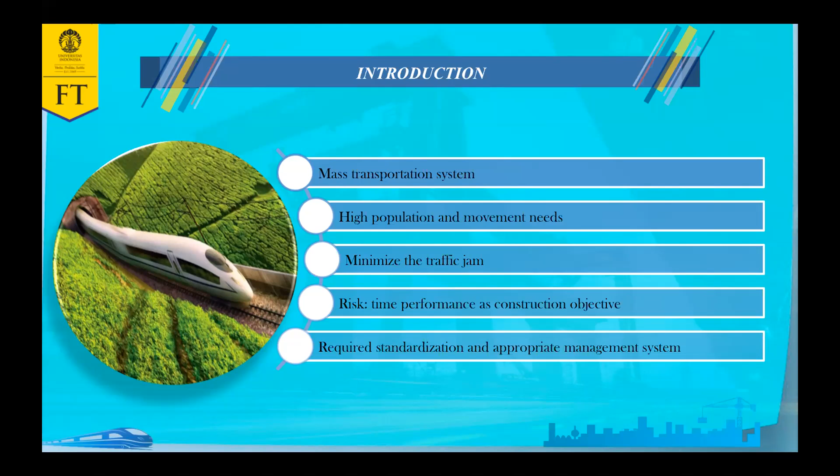Our concern in the development of standardized WBS is that for most of our projects, there is no formal approved WBS, I mean approved between the owner, the project contractor, and consultant. The cost estimation is based only on the BOQ, bill of quantity. And concern number 3 is different work packages and project activities on the BOQ among projects, and different work items. And the high-speed railway project is a new one in Indonesia.

The research questions and objectives. We have 3 questions in our paper. Number 1 is how to create a standardized WBS for high-speed railway. Number 2 is what are the risk factors based on resources, activities, and work packages that influence the time performance on a high-speed railway project. And question number 3 is how to develop a risk-based standardized WBS with the objective to improve time performance on the project.

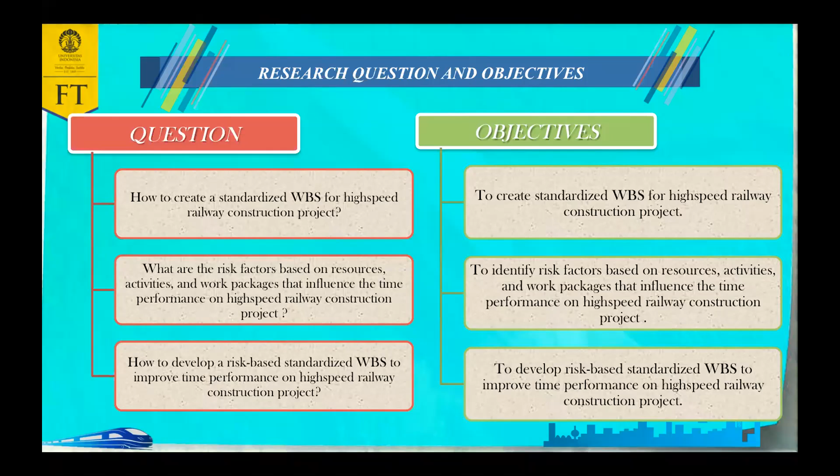Therefore, the objectives in this research are number one, to create a standardized WBS. Number two, to identify the risk factors based on resources, activities, and work packages. And number three is to develop the risk-based standardized WBS to improve time performance on high-speed railway construction projects.

For our refreshment, the work breakdown structure is the process of subdividing project deliverables and project work into smaller, more manageable components. The key benefit of this process is that it provides a framework of what is to be delivered. The WBS also provides the framework for the schedule management plan, allowing for consistency with the estimates and resulting schedules. The WBS provides the relationship among all the project deliverables and their various components.

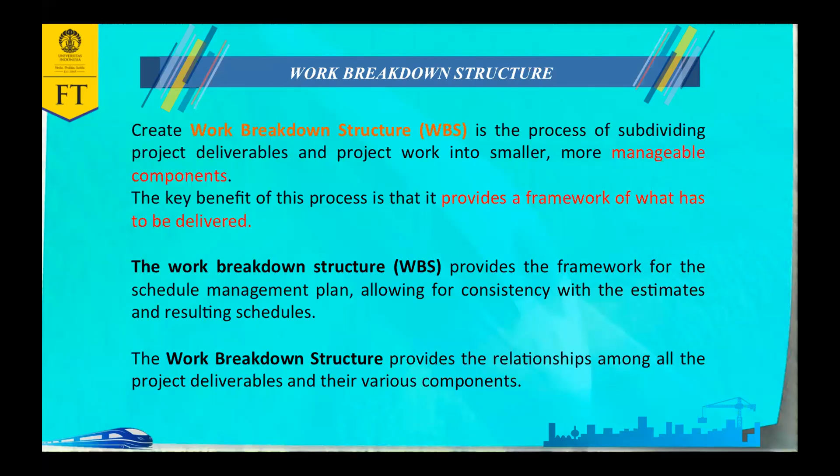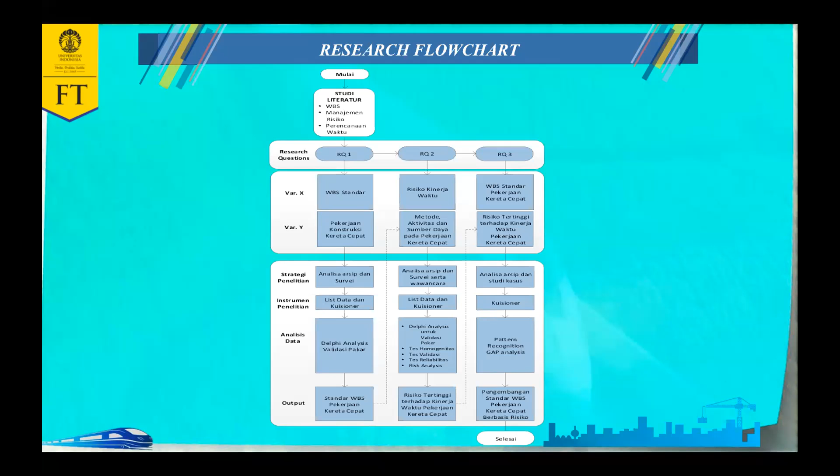This is our research flowchart. We are sorry, but it is still in Indonesian. It starts with a literature study, and then we have 3 research questions. This is the research variable, and the output for each question is the standardized WBS, the dominant risk, and the developed standardized WBS.

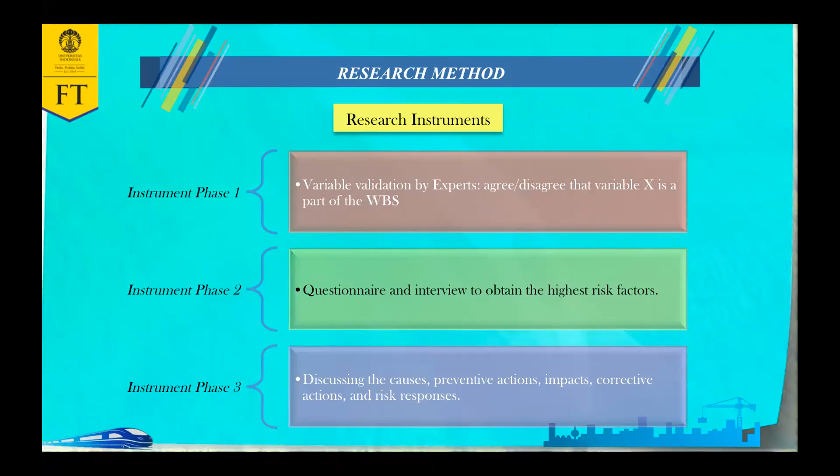These are the research instruments we have in this research. The first one is variable validation by experts, agreeing or disagreeing that the variable is part of the WBS. Phase 2 is where we provide a questionnaire and interview to the experts to obtain the most dominant risk. And phase 3 is discussing the causes, preventive actions, impacts, corrective actions, and also risk responses as well.

Didi, 3 minutes left. Yes, I'm sorry.

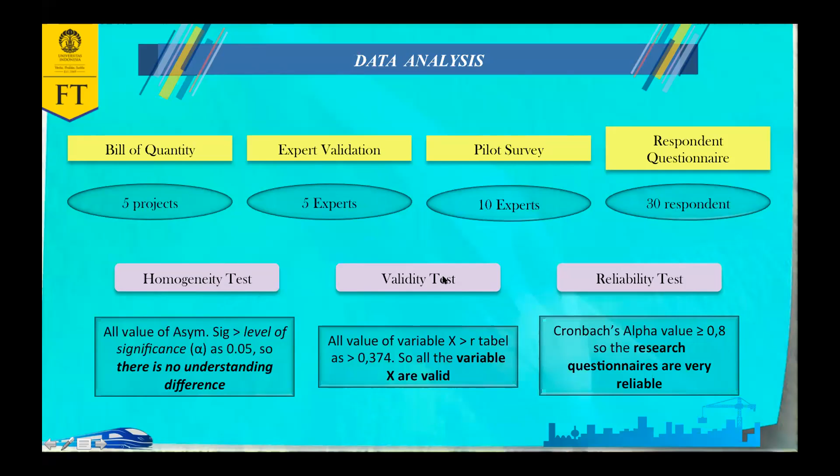This is the data analysis from 5 projects we studied, continued by 5 experts for validation, pilot survey, and respondents. We have 30 respondents. On the data we performed the homogeneity test, validity test, and reliability test, and all 3 tests passed as we expected.

This is a pattern recognition sample. For example, for risk variable number X10, we have 8 cause elements and 21 preventive actions.

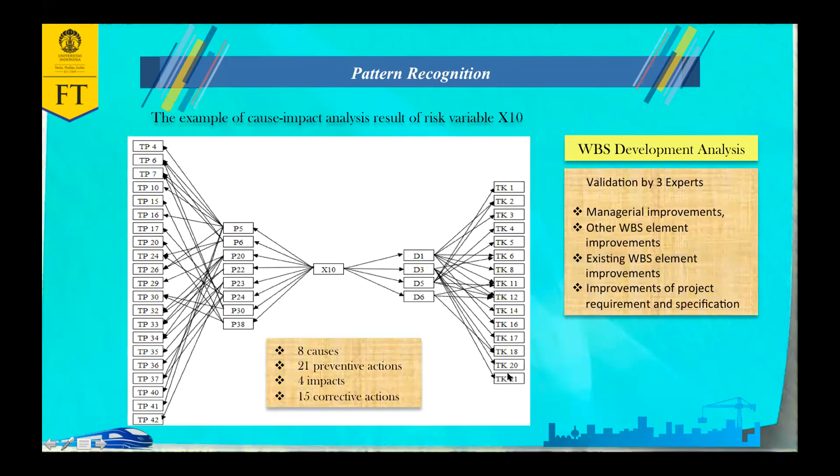And then the X number 10 is also results for impacts. These 4 impacts will be followed up by 15 corrective actions.

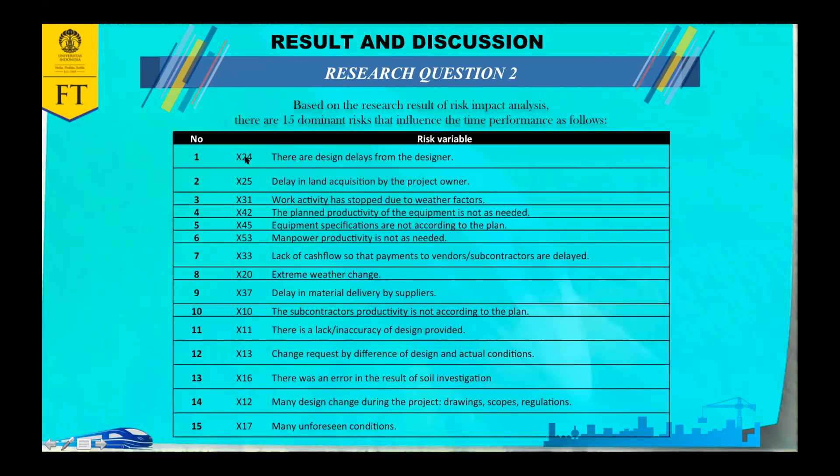This is the 15 most dominant risks that influence the time performance of high-speed railway projects, and we have ranked the 15, starting from X24 to X17.

And the conclusion is a standardized WBS for high-speed railway construction. We have 6 elements, as we also previously stated. And number 2 is there are 15 dominant risks.

Based on conclusion number 1 and number 2, we have conclusion number 3: development of risk-based WBS to improve time performance on high-speed railway construction. We hope that by performing and constructing the project with this WBS, we will minimize the risk of time performance, such as late or delayed projects.

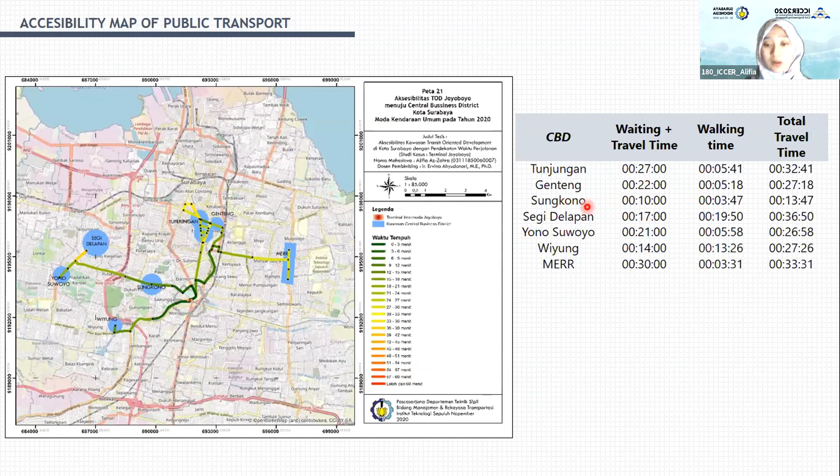Conclusion. This research is designed to calculate the travel time from a TOD transit point, Jayabaya terminal, to Surabaya CBD.

Based on the travel time survey result, you can see in the table and the graphic, it shows better accessibility to Surabaya CBD by private vehicle at this time.

So for further research, it is recommended to find several scenarios to develop the accessibility of Jayabaya terminal, accessibility for public transport, so it can bring success to the ride in the park and ride concept, and also transit in the transit-oriented development concept itself.

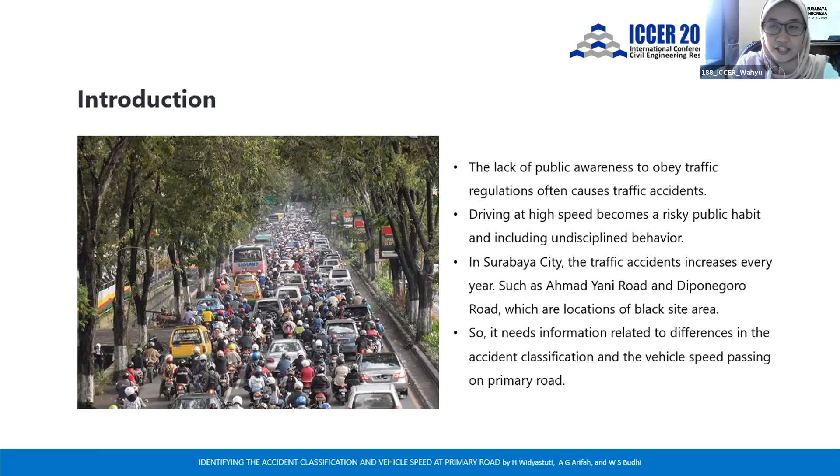And in Surabaya City, traffic accidents increase every year, such as on Ahmad Yani Road and Diponegoro Road, which are locations of the black spot area. Considering this condition, identification is needed related to differences in the classification of accidents and vehicle speed that can cause accidents in both locations.

The data used in this study are secondary data and primary data. Secondary data can be obtained from relevant institutions, while primary data is obtained from direct observation in the study area. And this is the data and its function.

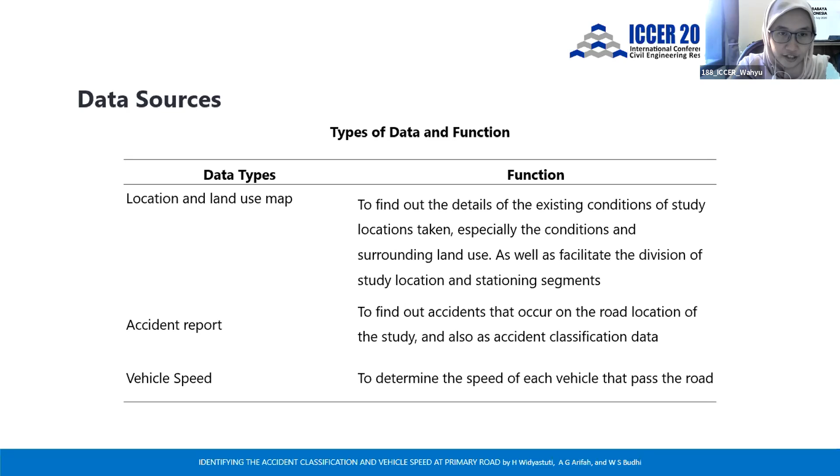For the method of this study, data analysis was carried out using the 5W plus 1H approach, namely why, what, who, where, when, and how. In detail, the classification of accident occurrence by grouping is as follows.

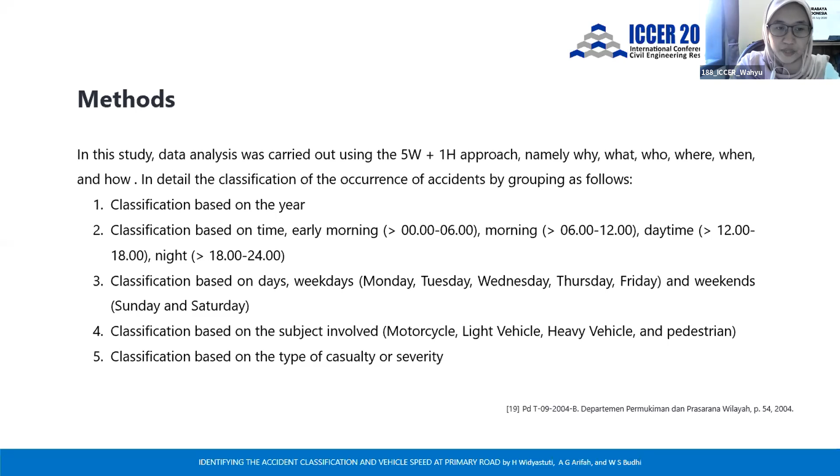First, classification based on the year. Second, classification based on early morning, daytime, and night. Third, classification based on weekdays and weekends. Fourth, classification based on the subjects involved, which are motorcycle, light vehicle, heavy vehicle, and pedestrian. And last is classification based on the type of casualty or severity.

The determination of black spot area has been analyzed using several methods, including accident rates, fatality rates, accident equivalent number, and cumulative summary. For the speed data, it was collected using measurement with an electronic speed gun, and the data was then tested for normality distribution as well as other standard statistical analysis methods. In addition, the speed limit on a primary artery road for the hub or urban area is 40 km per hour.

So this is the result and discussion. Accident classification on Ahmad Yani Road is shown in this table, and data analysis for around 5 years is divided into several categories, and the most traffic accidents based on the year is in 2017.

Moreover, the most traffic accidents based on the time occur on weekdays, Monday and Thursday, and also happen in the morning between 8 a.m. and 10 a.m.

The most traffic accidents based on the subject involved is motorcycle, and the most accidents based on severity are slight injuries. Whereas accident classification on Diponegoro Road, the most traffic accident based on the year is also 2017.

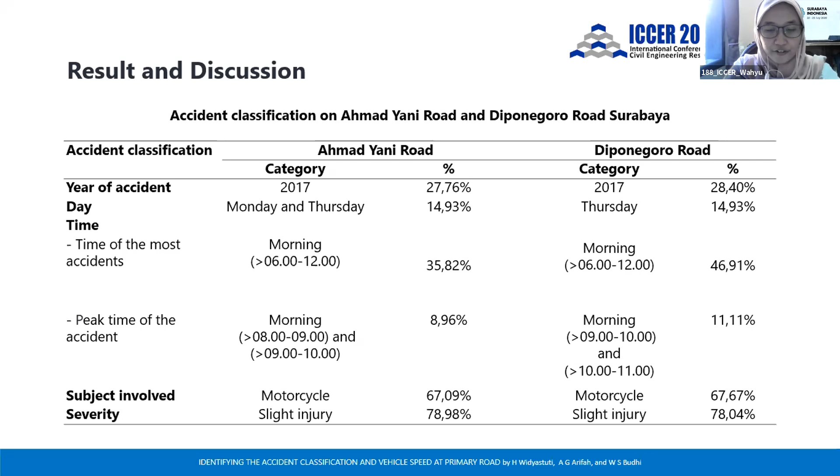And for the intersection of Diponegoro Road, it is at the Diponegoro-Sutomo intersection. For the vehicle speed on Ahmad Yani Road, Surabaya, the average speed on the west side is 49.6 km per hour, and the average speed on the east side is...

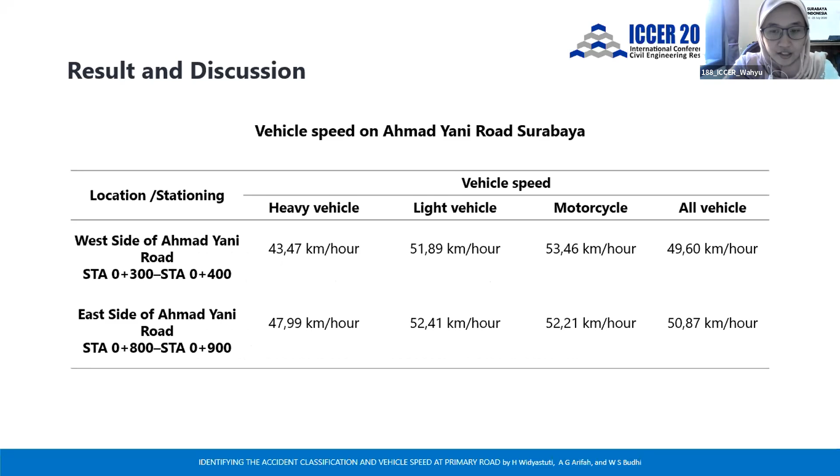50.87 kilometers per hour, whereas the average speed on the west side of Diponegoro Road is 43.44 km per hour, and the average speed on the east side of Diponegoro Road is 42.2 km per hour.

This could be possible because road users are in a rush to go to work or other important activities, and it could be that they are less aware of their driving speed, which has exceeded the limit.

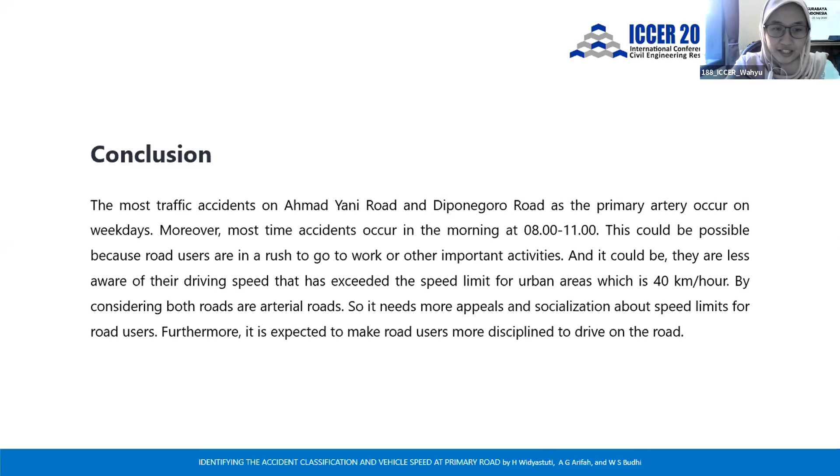The speed limit for urban areas, which is 40 km per hour, considering both roads are arterial routes, it needs more appeals and socialization about speed limits for road users. Furthermore, it is expected to make road users more disciplined when driving on the road.

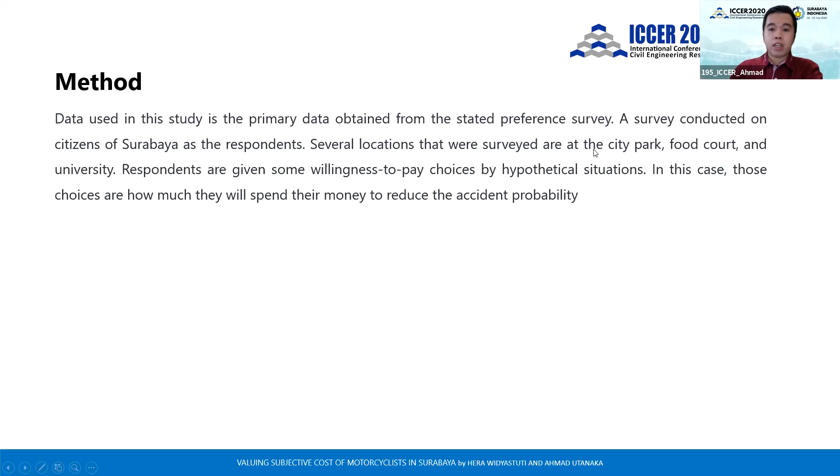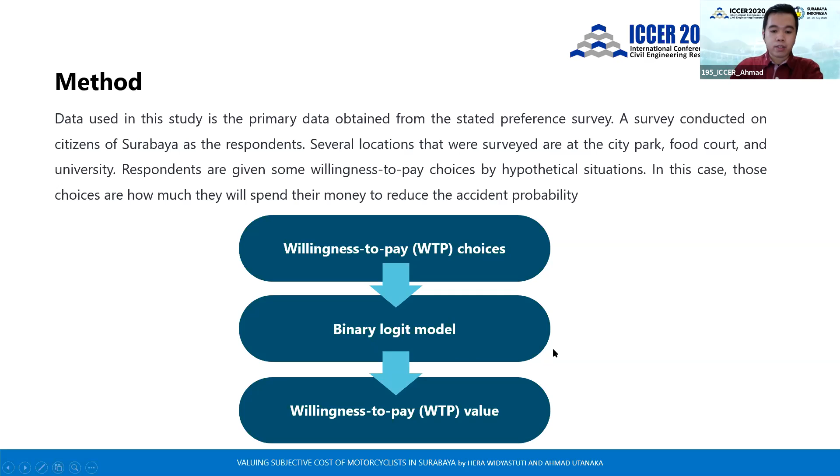Scenario 2 proves that with income increment, but age and number of children constant, the probability of reducing a traffic accident risk will increase. Scenario 3 proves that with an increment in the number of children, but age and income constant, the probability of reducing a traffic accident risk will decrease.

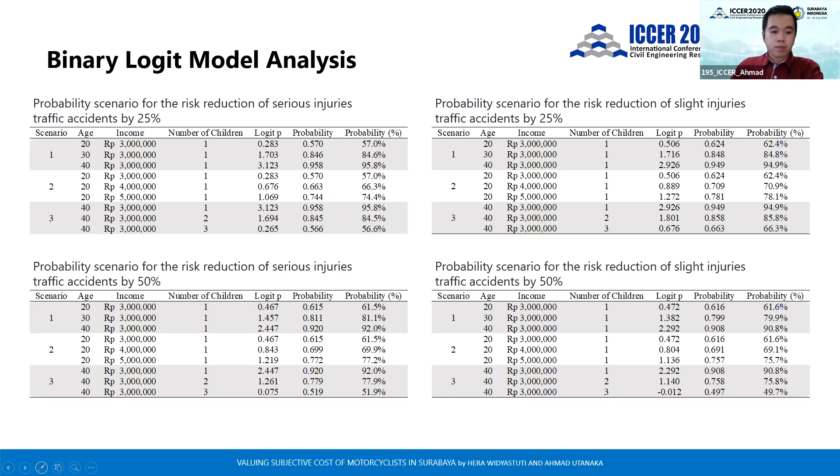The willingness to pay value for the risk reduction of serious injuries can be rounded to 126,500,000 rupiah, and the average willingness to pay value for the slight injuries risk reduction can be rounded to 13 million rupiah.

From this study, we can draw some conclusions. Variables that affect the willingness to pay choices are age, income, and number of children. Variables in each equation have a significance level better than 0.1, or 10%, so they are still acceptable and have an effect on the equation model.

The four equation models obtained show similarity; it can be interpreted that an increase in age and income will improve the probability of motorcyclists protecting themselves from an accident. However, when the number of children increases, it will reduce that probability.

The willingness to pay value of motorcyclists for the risk reduction of serious injuries is 126,500,000 rupiah, while the willingness to pay value for the risk reduction of slight injuries is 13 million rupiah.

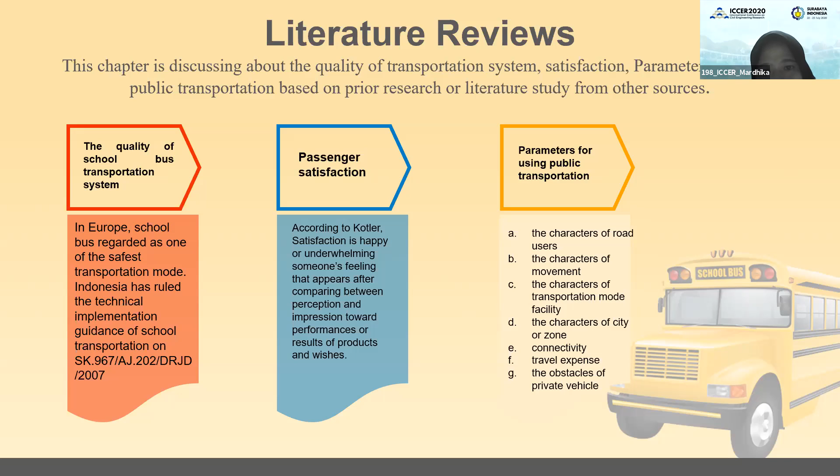Literature review. The literature review discusses some of the references: the quality of school bus transportation system, passenger satisfaction, parameters for using public transportation. Data collection. This research uses two kinds of data. They are primary data and secondary data.

Primary data: this data is obtained from survey and observation toward public school bus regarding the characteristics of condition, service and school bus trip. The researchers use closed questions and collect data by questionnaire that is spread to all students to get their satisfaction over the school bus performances.

Secondary data: school bus service route obtained from the Department of Transportation in Surabaya, the number of school bus passengers obtained from the Department of Transportation in Surabaya, time of school bus service obtained from the Department of Transportation in Surabaya, school bus services that are running obtained from the Department of Transportation, and the previous studies related to this topic.

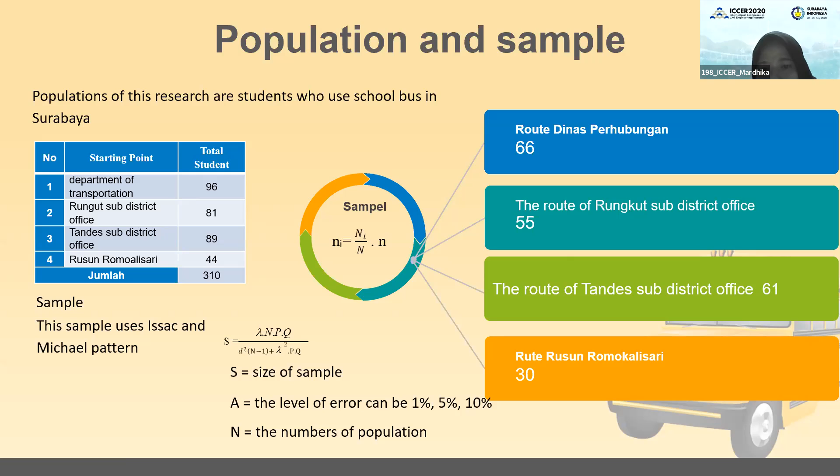Okay, population and sample. Population of research are students who use school bus in Surabaya. Sample: the sample uses the Isaac and Michael pattern. Route Dinas Perhubungan: 66. The route of Rungkut Sub-District Office: 55. The route of Tandes Sub-District Office: 61. Rusun Romokalisari route: 30.

Survey method: school bus operational performance. The researchers interview drivers and management about performances and services based on service indicators. Passenger satisfaction: the researchers survey passenger satisfaction by giving questionnaires regarding their condition and visit.

Data analysis technique. The analysis of school bus service performance: there is load factor, traveling speed, travel time, service frequency, the number of school buses, passenger waiting time, service time, start and end trip. Analysis of passenger satisfaction towards school bus service: seeking the level of suitability by using IPA, Cartesian diagram, by using SPSS 23 program.

The discussion: school bus performance in Surabaya, passenger satisfaction toward free school bus service in Surabaya. Surabaya school bus performance: route work assessment based on comparison data of assessment parameters of school bus in Surabaya. From the observation and interview results, by public vehicle service standard, the load factor average, trip speed, the number of vehicles in operation, and waiting time are in good category. The load factor average is 80% and less than 70%. The school bus speed is more than 10 km per hour.

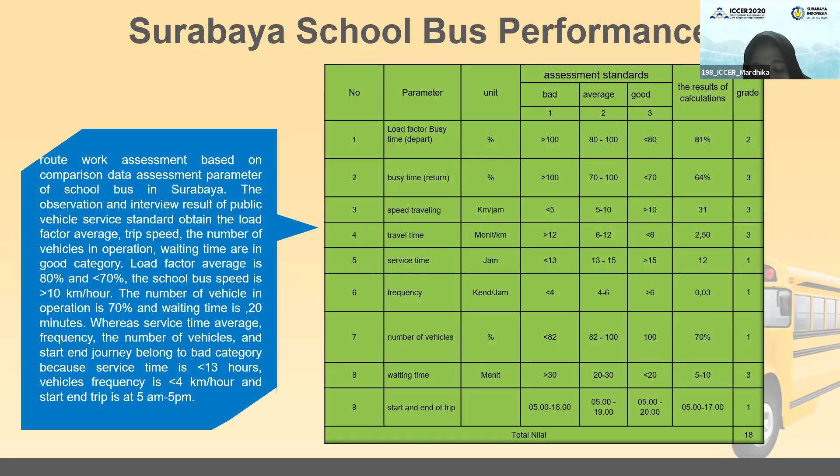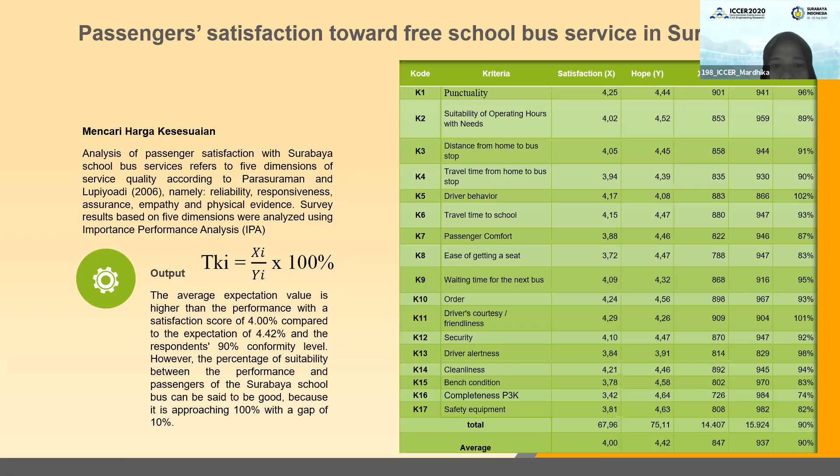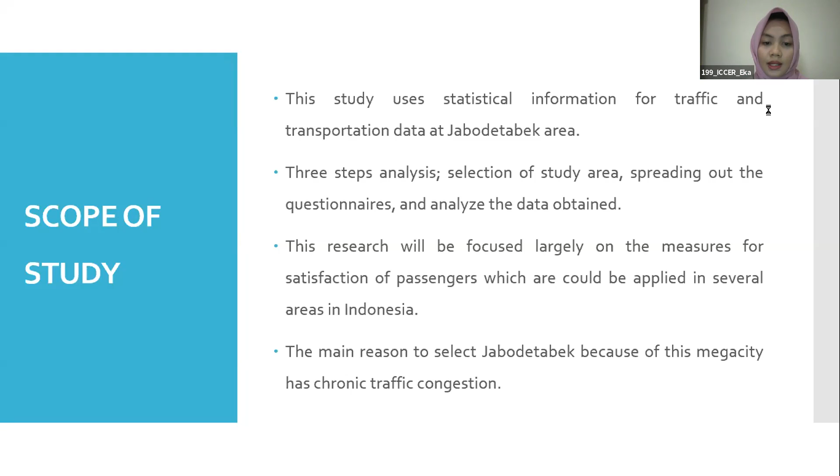Research will be focused largely on the measures for satisfaction of passengers, which could be applied in several areas in Indonesia. And the main reason to select Jabodetabek is because this megacity has traffic congestion. There are three significances of this research. The first one is to examine the level of satisfaction with the performance of public transportation service. Second, the impact of the data obtained on the performance of public transport. The last one is it will help various public transport providers to improve their service in order to retain, maintain, and attract more users.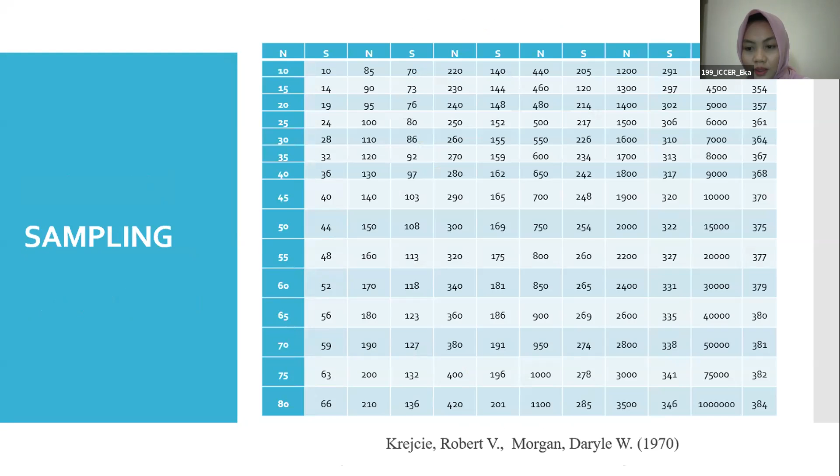Here is the study area of Jabodetabek: Jakarta, Bogor, Depok, Tangerang, and Bekasi. And here is the method of sampling. We refer to Krejcie and Morgan in 1970. With a population of more than 10 million, we have a sample of 384. Here's the methods and data collection. We have two kinds of data, primary data and secondary data. Primary data is questionnaires and observations, while secondary data is from books, journals, papers, and other documents which are relevant to this research.

Before we conduct the research, we conduct the pilot study. It aims to reduce the problems of respondents in answering questions on the questionnaires, which will have a high impact on the response rate of respondents, and also to find out the level of reliability and validity of the questionnaire. We have three tests conducted in this research. First is validity, second is reliability, third is structural equation model.

Here is the respondents' demographic information from each group, like gender. As you can see, the majority is male with a percentage of 61.5, and for age the majority is 18 to 25 years old with a percentage of 44.9. Occupation is dominated by private employees with a percentage of 26.9, and the lowest one is the not working group with a percentage of 2.1.

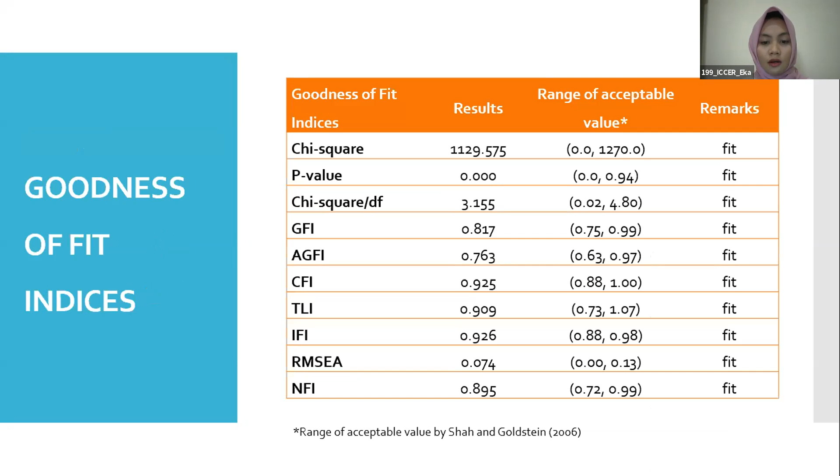Here are the standardized factor loadings in the overall CFA model. The constructs are service quality, which is the core service, then service quality, which is the physical environment, then value, satisfaction, and behavioral intention, as shown here. And here is the goodness of fit in this table, where the marks are all fit because they are in the range of acceptable values taken from Shah and Goldstein in 2006.

And here are the results of Cronbach's alpha and convergent validity for the overall CFA model. As you can see, here are the factor loading, Cronbach's alpha, AVE or average variance extracted, and CR or composite reliability. The highest Cronbach's alpha is for service quality with a value of 0.9, and the lowest one is satisfaction with a value of 0.8.

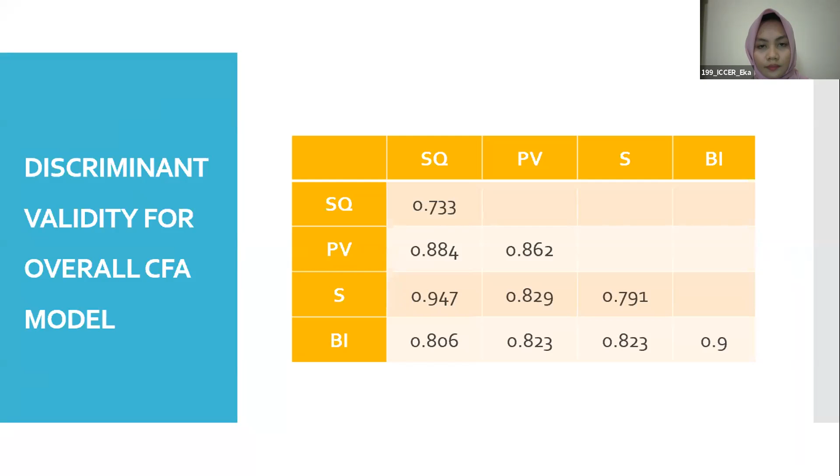For AVE, the highest one is behavioral intention with a value of 0.8, and the lowest one is service quality with 0.5. And the last one is CR, with the highest value of 0.9 by service quality, and the lowest one is perceived value with a value of 0.8. Here is the table for discriminant validity for the overall CFA model. And this is the structural model for service quality, perceived value, behavioral intention, and satisfaction.

And here are the results of the hypothesized causal effects of the constructs, where service quality to perceived value is supported, service quality to satisfaction is supported, while service quality to behavioral intention is rejected, and also perceived value to satisfaction is rejected. On the other hand, perceived value to behavioral intention is supported, and satisfaction to behavioral intention is supported.

So here is the conclusion. Overall, the KRL passengers in Jabodetabek feel dissatisfied with the service provided and the performance of KRL. Nevertheless, the involvement of passengers in public transportation, especially KRL, and the behavioral intention of passengers to continue using KRL remains high. There are some things that need to be improved in public transportation to attract private transport users into public transportation. Based on the results obtained, factors that contribute to the intention of people to use KRL are punctuality, comfort in waiting for the train, staff behavior, fares, cleanliness, and so on.

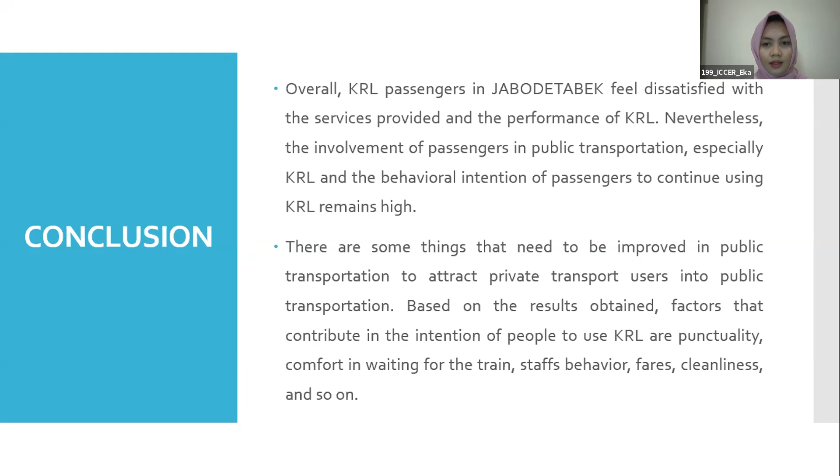And Thailand, they have Bangkok as well. Urbanization occurs because people move from rural areas to urban areas. For instance, statistics reported that 80% of people live in urban areas in European countries due to this phenomenon. There are several factors that contributed to urbanization. The main factor is economic growth.

Rural-urban migration is happening on a massive scale due to population pressure and lack of resources in rural areas. So people living in rural areas are pulled to the city. Often, they believe that the standard of living in urban areas will be much better compared to rural areas. This is because economic growth in the city area is rapidly increasing. People also believe that urban areas can provide them with good and sufficient job opportunities. This is why people move to urban areas from rural areas.

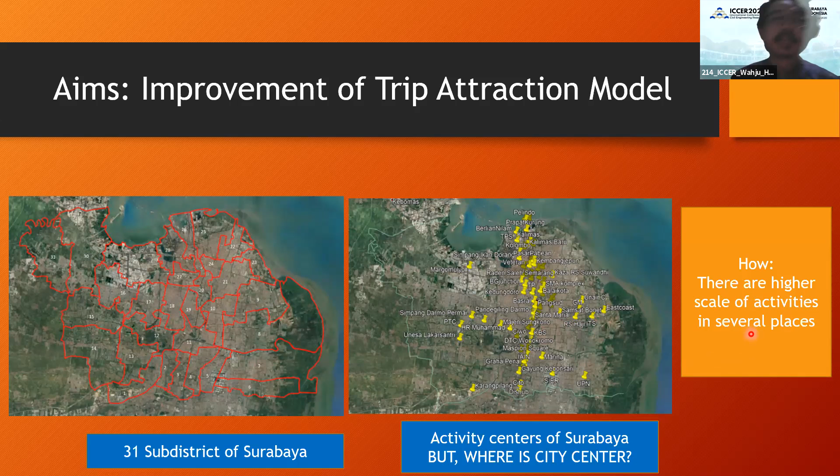So we use Google Earth and track the slider to 2011, and then we digitize in order to know the floor area of shopping, industry, office, etc. And then this is the data. Tj is daily trip attraction, and then X1, X2 until X6.

This is floor area of street shopping place, and then bank, and university, industry and warehouse, and then small shopping mall and shopping center, and then distance. This is the average distance between the city center and the residential areas.

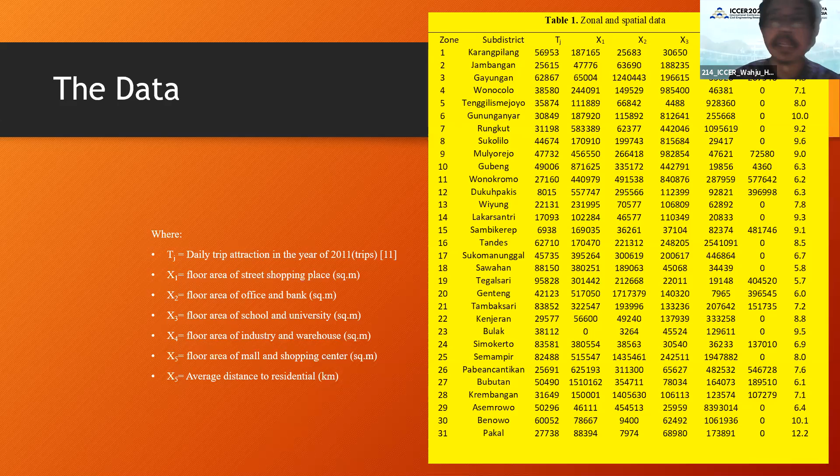And we try to apply the decay model with multiple linear regression incorporating distance. This is distance. And we found that the chi-square between the model and the data is around 100,000.

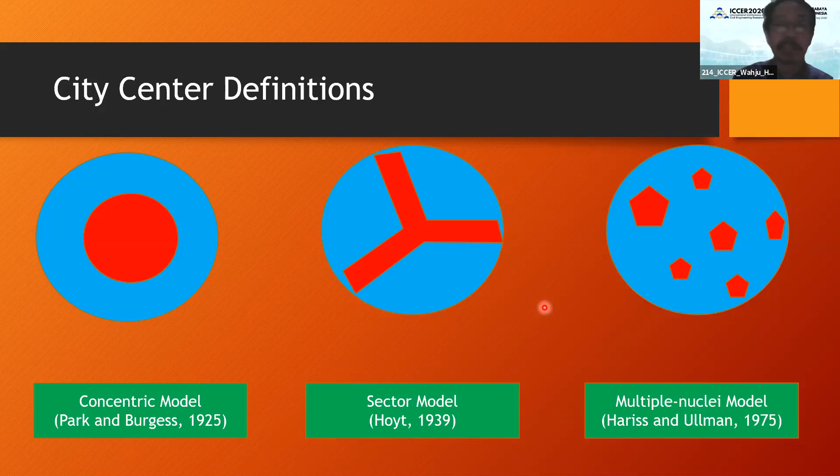Then we will incorporate the city center by using three definitions: from Park and Burgess in 1925, this is the concentric model. From Hoyt in 1939, this is the sector model, and then Harris and Ullman, 1975, the multiple nuclei model. Which one is the city center in Surabaya?

We use geographic weighting. This is from geographically weighted regression, Fotheringham 2002, and then our model is non-linear, so we use the generalized reduced gradient nonlinear method from Lasdon. First, we consider the concentric center from Burgess. So this is the city center, and the rest is the periphery area. So there are two geographic groups.

We weight them, and then the model is like this. This is a coefficient with K. K1 is for the centers, and K2 is for the periphery area, for X1, X2, X3, X4, X5, and X6 and for the distance. We found the chi-square is slightly better than the conventional one, and the distance does not influence the trip.

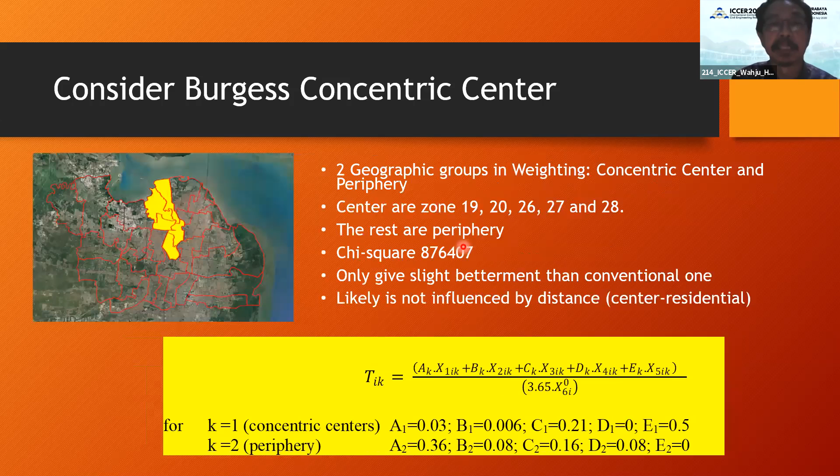3 minutes left. Thank you.

This is Burgess, this is Hoyt, and this is Harris-Ullman. And so we have three scales of city center: the centrum one, then the corridor one, and then the satellite one. And the chi-square is far better, only 300,000. And distance influences the trip. So we have 4 K, A1 until A4, B1 until B4, C1 until C4, etc.

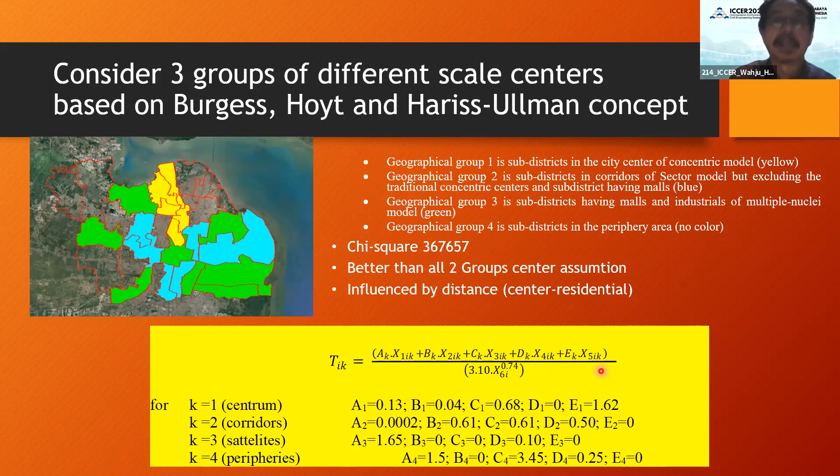And then from the chi-square value, we can see that the concentric model is 6% better than the conventional one, the DG one. And then the sector model gives a betterment of 29%, the multiple nuclei model 36%. And then the three levels of city center give a betterment of accuracy up to 60%.

But we use many constants. And then we compare it with a gravity model of trip distribution, doubly constrained. There are 2n constants.

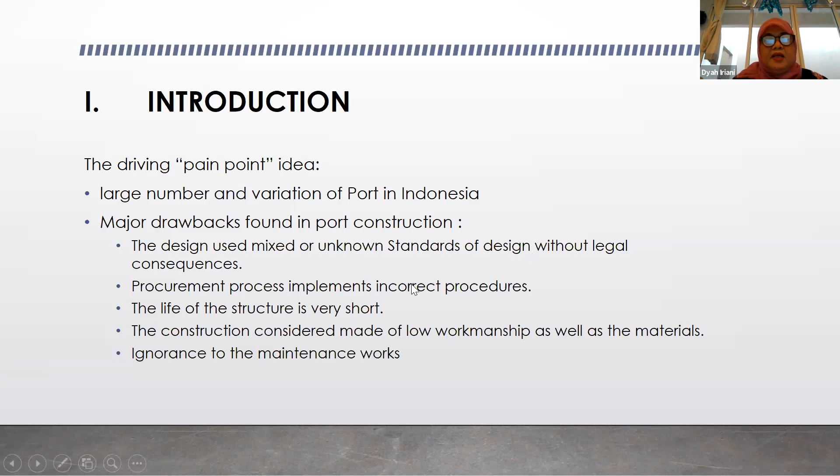The background of this research was actually my own experience in designing ports in Indonesia. We are the largest country with a large number of ports, as well as variation of function and hierarchy of the ports. So we actually have a series of major drawbacks or major problems occurring in port construction and the construction process. First of all, which is very important, is that most designers use unknown standards, unknown standards without legal consequences. Therefore, several problems arise with failure of structures, and nobody can be blamed for the failure, etc.

The rest of the problems are only the impact of the first problem. In the world, we can find three most widely used standards for port design, and here I will choose them as well as the basis for the evaluation of design standards in Indonesia.

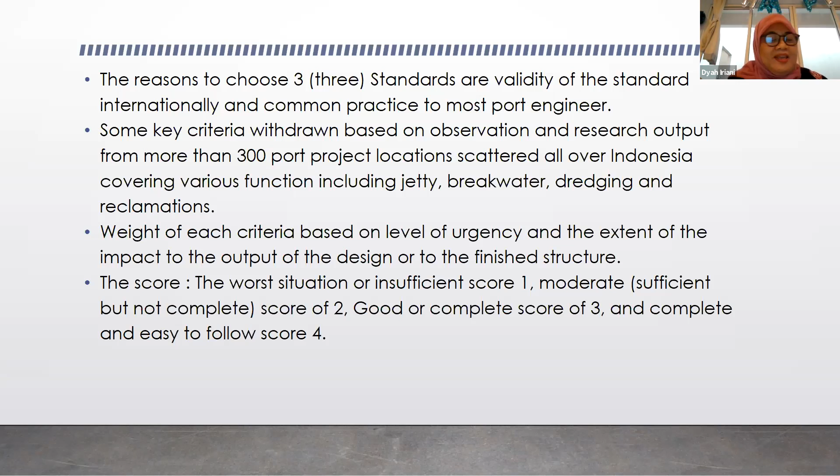Then we will derive some criteria, and this criteria was derived based on 300 port projects that I collected data on long ago, over 30 years of my career. I collected all the data, and from all the data I can draw some conclusions, and we can see here what the problem is.

This research is expected to give ideas to the Indonesian authority or whoever, to as soon as possible deliver a standard for Indonesian port design. And the benefit, especially for higher education or university education, is that we can provide a curriculum or subject or material that is in line with the standard, because nowadays I meet several students or experts disputing or confronting each other because there is no firm basis for the design.

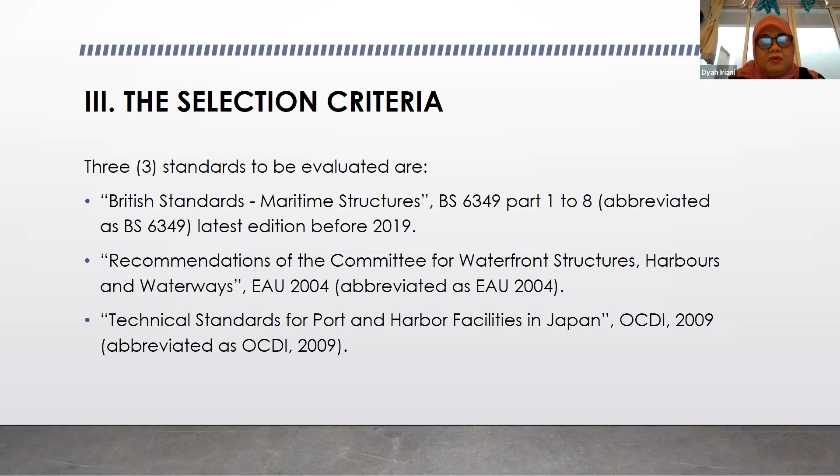This is also a very good standard. And we can also choose the Japan standard, OCDI, which is the latest publication from 2009. We cannot use all three of them, but we have to choose because they have different bases for calculating, and we can see later that they have differences. So we only have the option to choose one of them. Therefore, I made the evaluation, hopefully it can make it easier for anybody to choose which one is the best standard to be applied in Indonesia.

And the criteria that I deliver for this evaluation is, first of all, that the standard should cover detailed guidance and cover as much as possible the types of structure in the area of port, or in port area.

For example, some standards don't cover breakwater or dredging, but others cover all or most of the possibility of structure types in the coastal area or port area. So we have to choose this criteria and evaluate all the standards based on the first criteria.

Second, the design procedure and load patterns I consider very important. Construction lifetime, safety factor formulae and equations should be available in the standard, and monitoring and inspection. These five criteria are sufficient, and at this first approach I consider all these criteria can be weighted equally. So if all the criteria weighted 100, each criteria will be weighted 20.

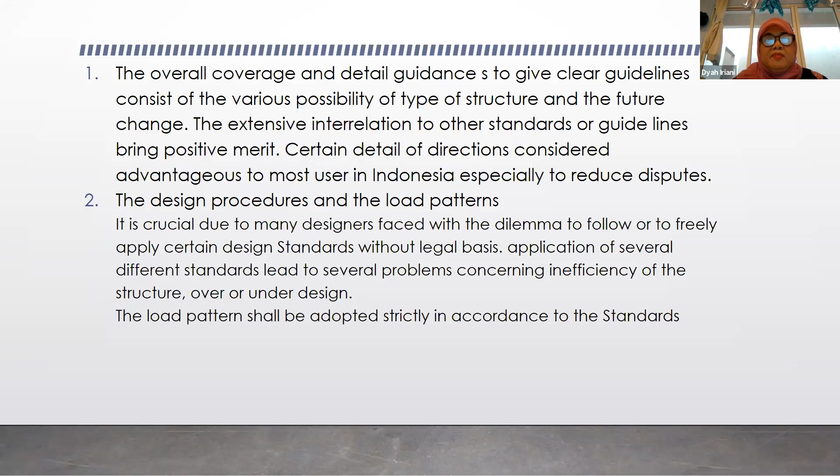The overall coverage, as I previously explained briefly, has advantages to most users in Indonesia because maybe 95% of the whole world's types of port structures will be available in Indonesia. So we require all those kinds of possibility of guidance on structural types in port or in coast. And the design procedure also.

I consider this the most important problem we face in Indonesia. Most engineers, sometimes students or the lecturer itself, are confused about what is the best procedure to be applied. Therefore, the standard should cover the design procedure and the best load patterns. The construction lifetime and safety factors, the formula to calculate, this is also important or urgent to be available in the standards, and this will help for education.

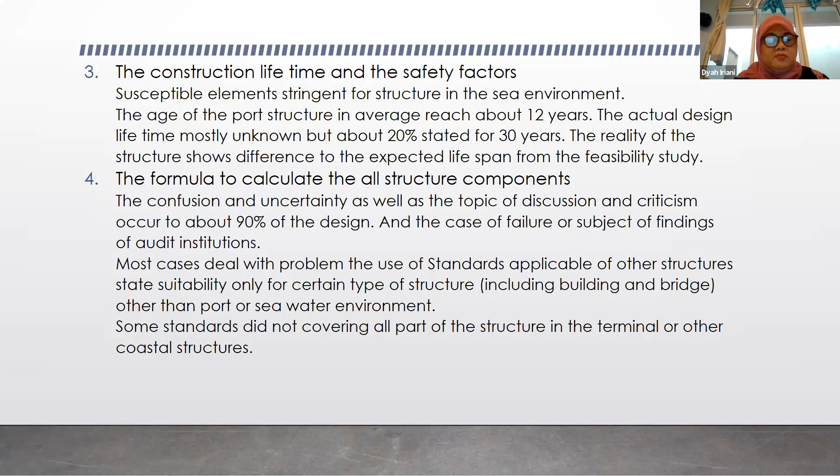For example, calculating bearing capacity will be done 100 different ways by 100 different engineers. When we have standards, then we can eliminate it to 1 or 2 or 3 formulas to be used. That reduces the possibility of confusion. And the last criteria, monitoring and inspection, is also 60% of the problem in Indonesia, that we have ports without good inspection.

Now, after settling the criteria, I start with the evaluation. First of all, for the British Standard, concerning criteria number 1, here it shows that British Standard has the most complete coverage concerning the maritime structure.

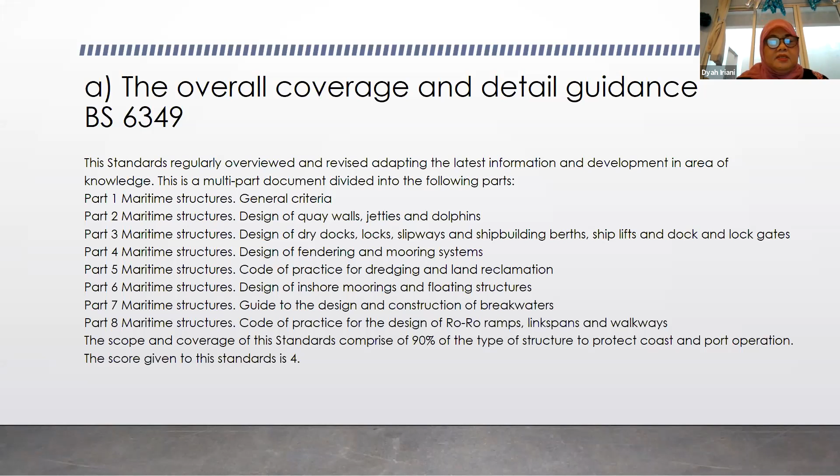British Standard 6349 covers, as I write it down, part 1 to part 8. So it covers almost 11 types of structures. This is the most complete standard.

On the other hand, EAU gives, we can say, less or a bit equal to OCDI, but EAU is more focused on the structure of wharf or quay wall. And OCDI, as I previously stated, is a less complete standard.

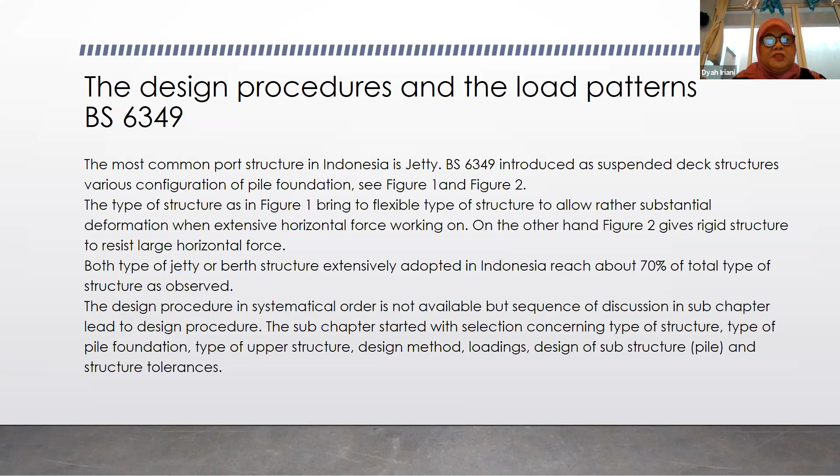Considering the design procedure, BS 6349 delivers, unfortunately, less clear, or I must say extremely unclear procedure. But on the other side, they give a clear and overall consideration to any possibility of the load or forces occurring on the structures.

And the most amazing— I'm sorry, I have a grandson, so maybe a little voice here. These are two grandsons of mine.

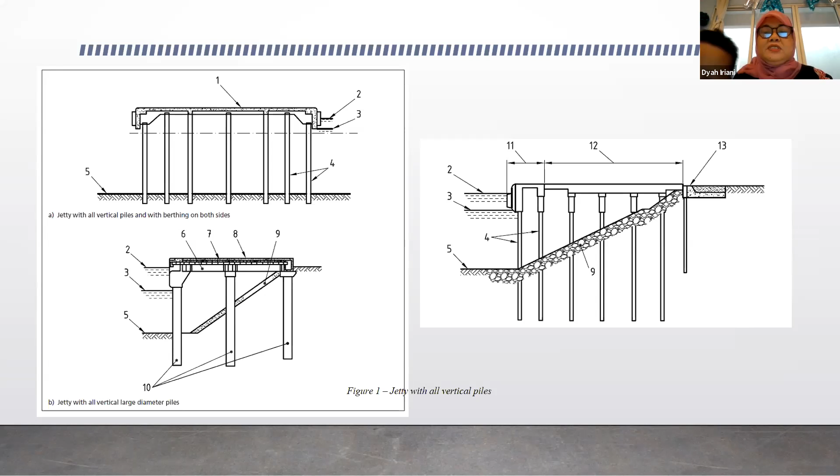I'm sorry. And the British Standard provides the best example for the construction of structure patterns for Indonesia, because maybe 70% of structures in Indonesia adopt this standard. We see here this is available in British Standard as well as in most structures in Indonesia.

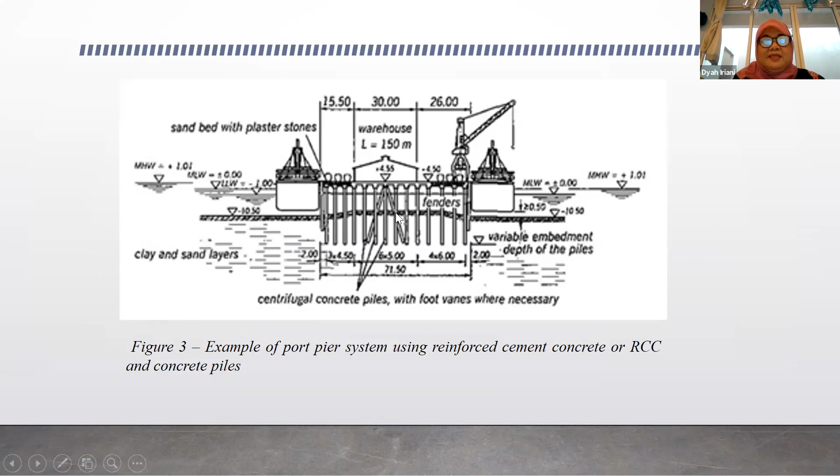This one also. But EAU, I can say more quickly, provides less popularity to Indonesian designers. OCDI gives results rather equal to Indonesian common practice in engineering. So we are practicing using this type of structure, but the British Standard gives a better overview.

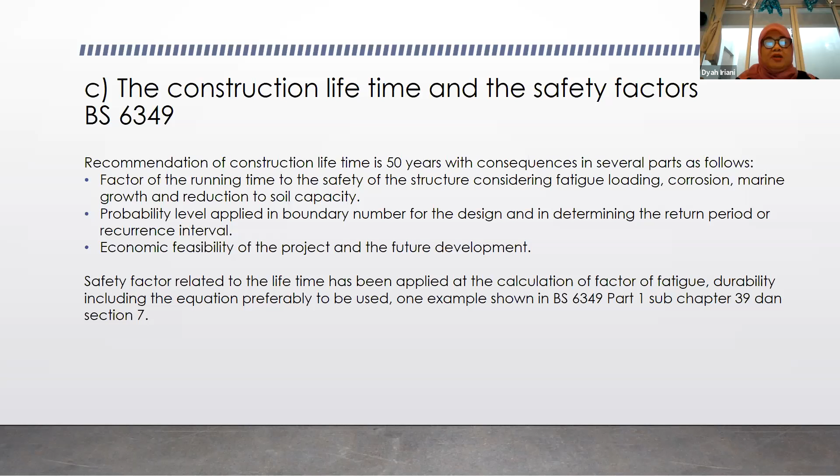For construction time and safety factors, British Standard gives some factors to be reviewed. First of all, they give safety factors based on probability level. This is a very firm basis for the design, because most other standards are not using a statistical base or approach.

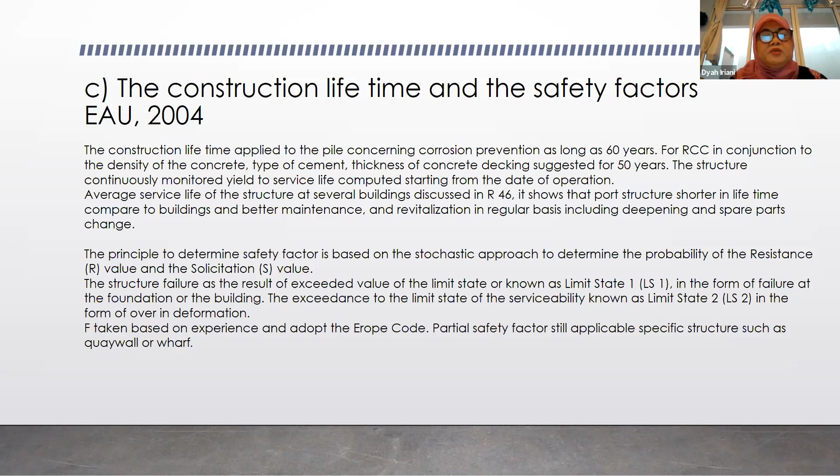And the EAU, on the other hand, gives the best basis or assumption for the safety factor. They use a statistical approach. For example, they use limit states for several limit states for the safety factor. This was adapted to almost all European codes nowadays, that the safety factor was based on statistical approach. Compared to OCDI, they are not using a statistical approach.

This is a bit dangerous, because if anything happens, we cannot trace why. But for the EAU, we can easily trace why we have a failure. We can see what's wrong.

The fourth criteria that I consider very important is the formula to calculate the structure. BS 6349 gives complete equation, but BS 6349 should be adjusted or connected to other British standards. That is the weakness.

We have to read all the British standard before we can conclude something. British standard can be as large as one library. They have very extensive code.

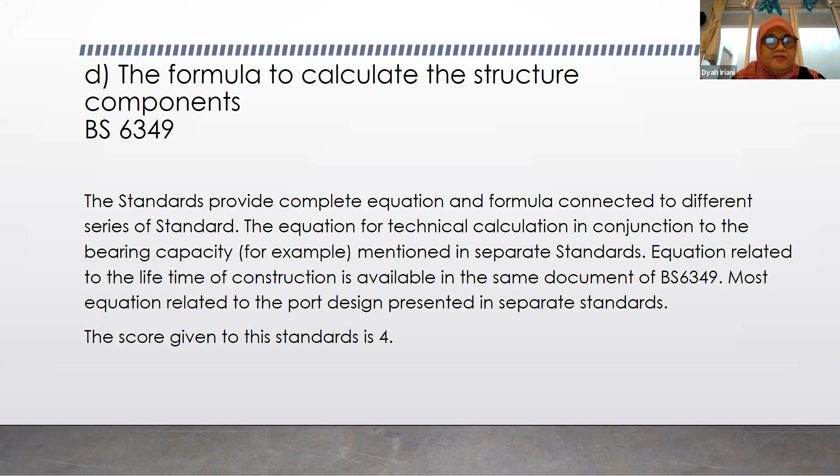EAU gave rather simple but not so complete. OCDI gave simple but complete. They have simple guidance and simple formula or equation, complete to almost all the problem.

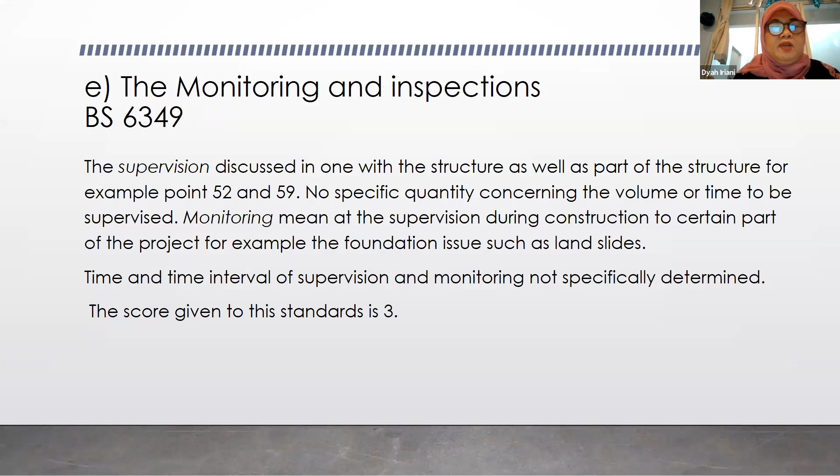The fifth criteria is the monitoring and inspection. This one is not so complete in BS 6349, but in EAU they provide relatively complete instruction on how to monitor, inspect, and supervise any detail of the structure. This is very good for monitoring and inspection.

OCDI also gave a quite good monitoring and inspection aspect, but if we have to compare, EAU is giving the highest. Unfortunately, I only give the score 1 to 4, I cannot give 3.5. So for EAU, I give 4. For OCDI, should be 3.2 or 3.3. But maybe for the next research, I will revise all this method.

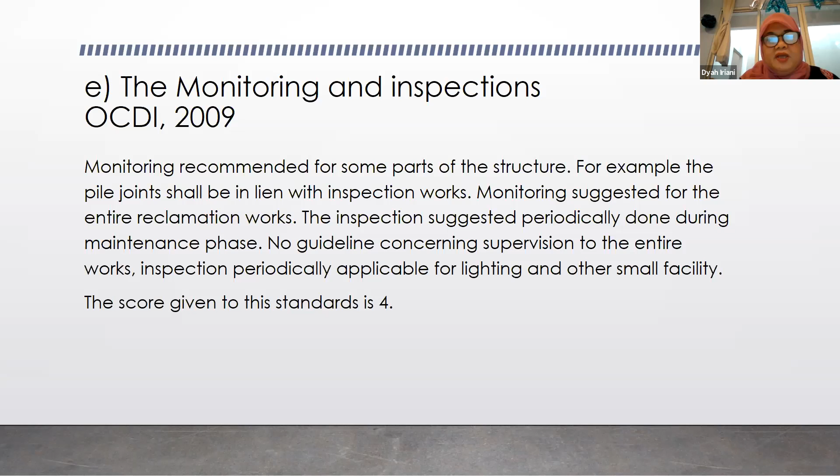This is the first approach. Now I can conclude, after weighing multiplied by score, that British standard gives the best approach. I'm very much expecting that government or government bodies can adopt, follow, or continue this research, or I myself will drive myself to continue this research, so as soon as possible Indonesia can have the standards, reducing the possibility of any confusion.

That's all. Thank you, Bu Hera. Good evening, everybody. Thank you. Okay, bye-bye. Sorry for all the disturbance.